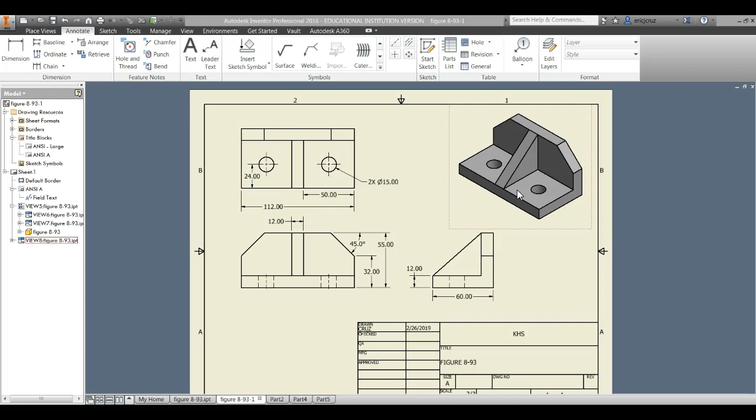Alright, so start a new part. Make sure your tools, document settings, units are set to millimeters. Apply, close. 3D model, start a 2D sketch.

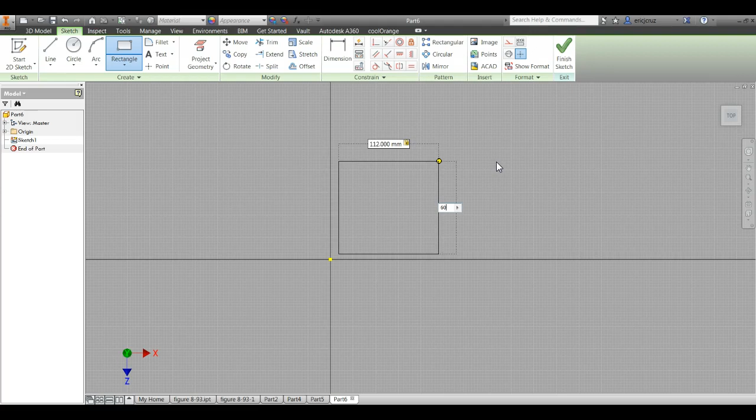We're going to start on the XZ plane. Make sure top is tilted to the horizontal side. The bottom is 112 by 60. Enter. Finish sketch. Extrude that by 12.

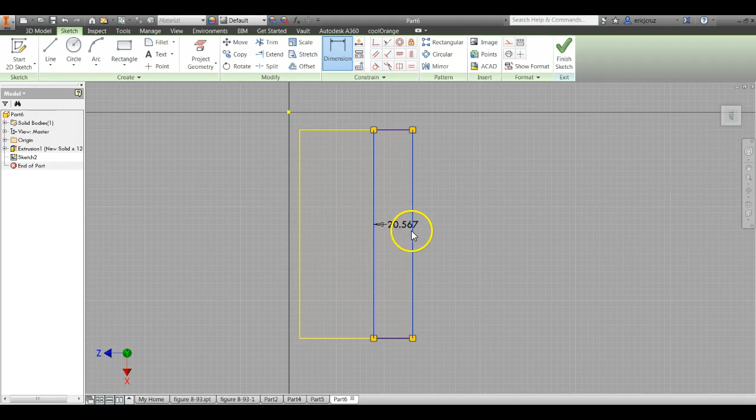Start a new sketch on the top there. Draw a rectangle from corner to side. Dimension that to 12. Finish sketch.

Extrude this one. This is going to be 55 minus 12.

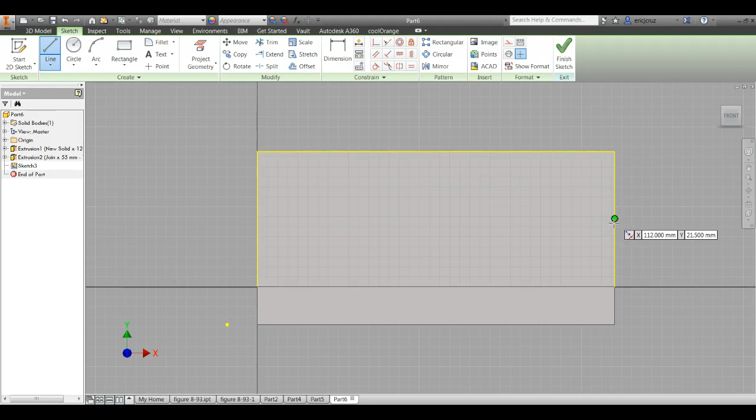Right-click new sketch on that surface. Click on line. Don't let it snap to the midpoint here where it's green. Snap it underneath it, and snap to there. Click on dimension. Click on project geometry.

Project the geometry of this surface. Then click on dimension. We're dimensioning from this point to the bottom, and that's 32. Then we're going to dimension this angle to 45. Click on this top line, then click on this line, and make that 45 degrees.

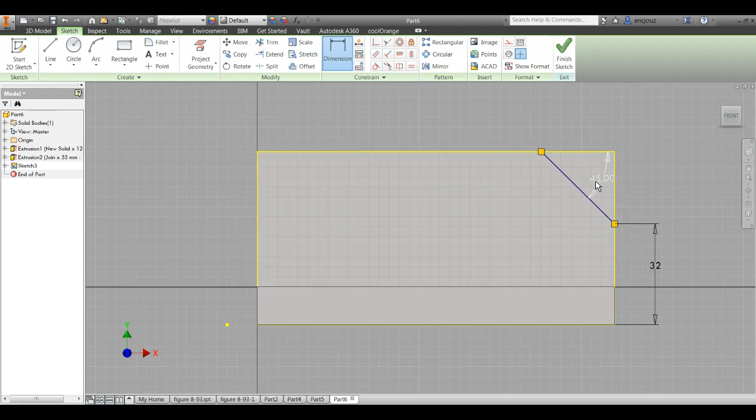We got to close up that triangle shape so that when we extrude it, it'll actually cut. Finish sketch. Click on extrude. Select the triangle. All, cut.

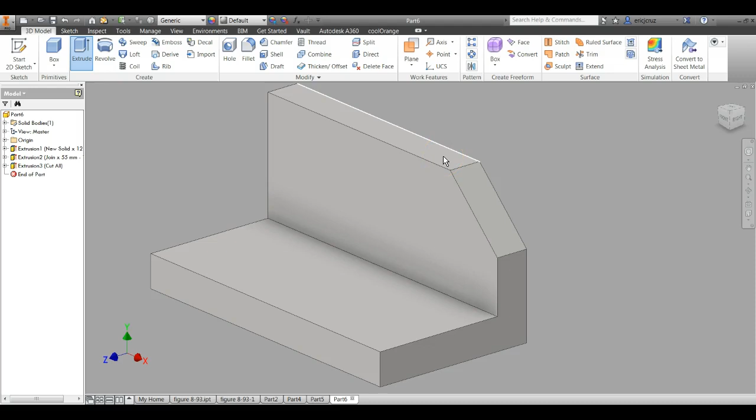Click on plane. Then click on mid plane between two planes. Select this surface. Flip your part. Select the surface, and you get a mid plane in the center, in the middle.

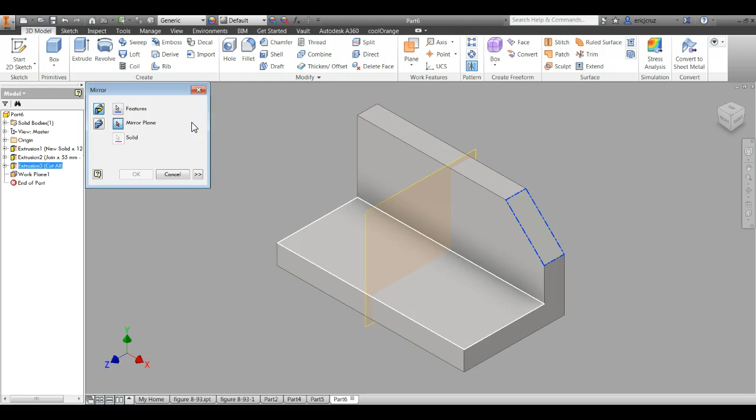We're going to click on this mirror button. Click on the feature. Select mirror plane and select the work plane 1. See that green line that pops up? Click OK, and you have mirrored that feature.

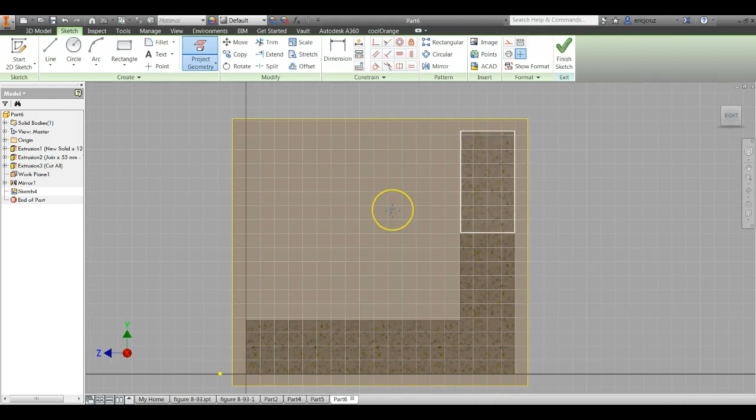On this work plane that we've created, we're going to draw. Right click, new sketch on that work plane. Go to sketch. Right click, slice the graphics so that you can see that plane's area. Click on project geometry. Project the geometry of those surfaces.

Click on line and connect this corner to this corner, and close it up. Finish the sketch. Click on extrude.

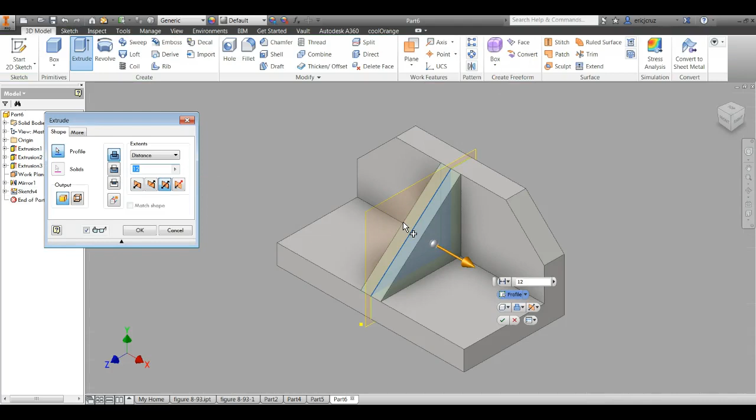This time we're doing a symmetrical extrusion. That is 12 wide on this surface. Click OK.

Right click, new sketch on this surface because we're going to make those holes now. Make a circle. That dimension is 15 in diameter. The dimension is 24 from the center to here. It's 24. Okay, great.

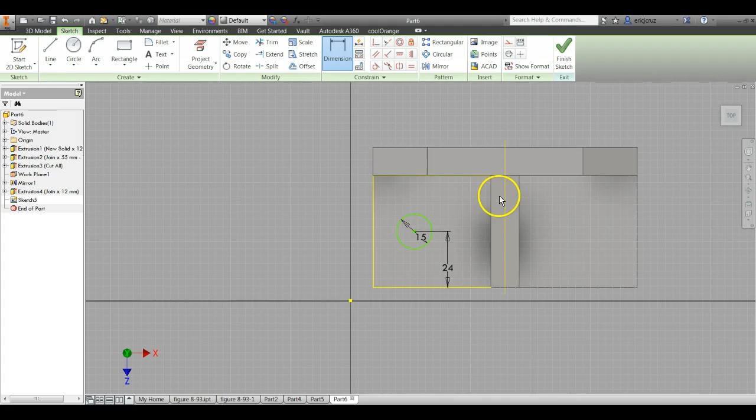And it is from the midpoint to the center. I don't think I can do that. Let's see, what is the best option here? If I click on project geometry, dimension here to, I'm not getting my midpoint.

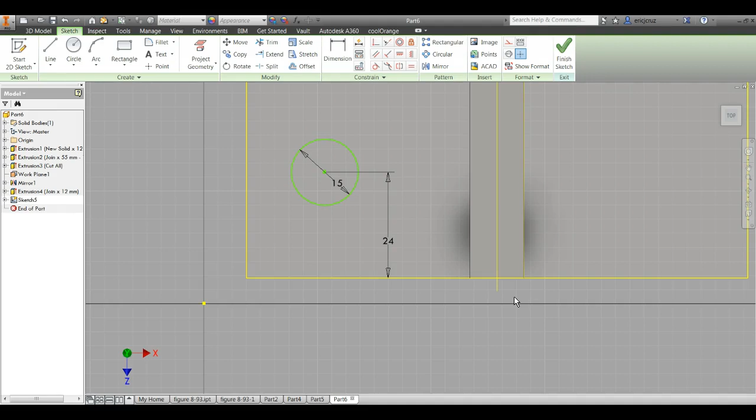Okay, let me draw my other circle here. Dimension, this is 24. The distance between the two circles is 64. 64. Oops. Just enter. And we need to center that.

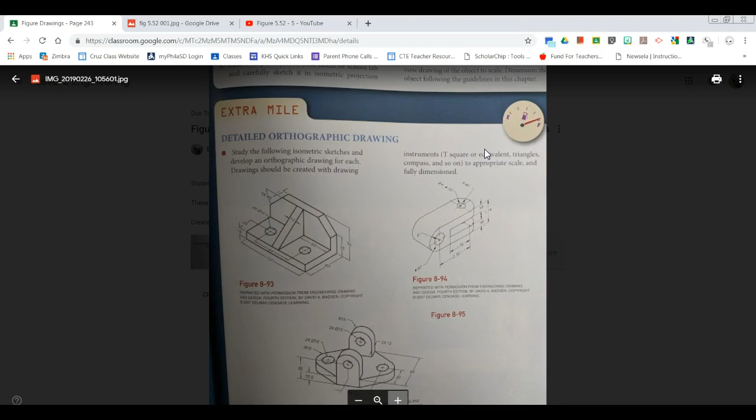So, oops, I don't know why I did that. Let's see, I want to go to the... It's 64, yep. So it's in the center. Okay. So it's gonna be...

Alright, so the trick here is to figure out what this distance is. That's 50. This is 64. The total distance is 112. So I'm just putting these numbers up so you can see them. Okay. So that means that...

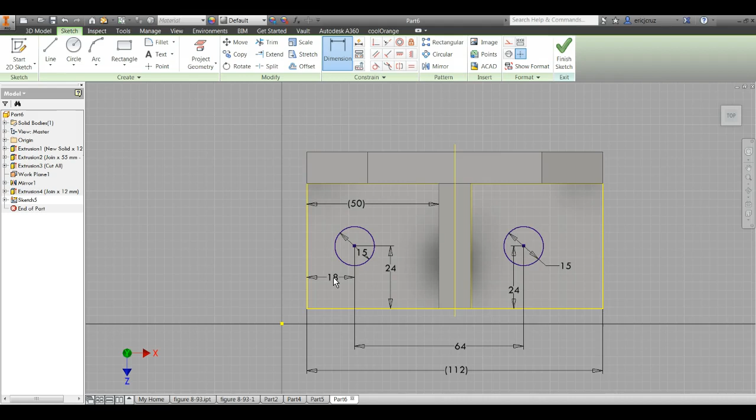So half of 64 is 32. So that would be 50 minus 32. So the dimension between here and here is 50 minus 32, which is 18. Okay, so that's definitely wrong.

Because if I go to tools and distance and I measure the distance between here and the midplane, I get 38. That should be 32. So what I'm going to do is a little trick here.

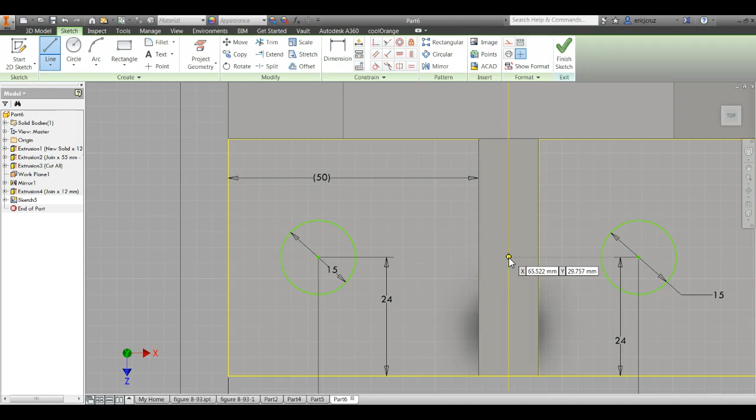I'm going to click on my line tool and draw a line that's 32 millimeters long. I'm going to move this until it snaps there and then dimension that. Hey, yeah, that's what we want.

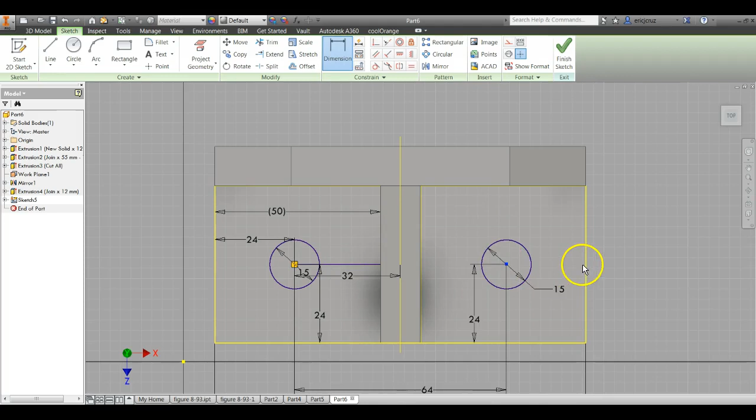So this should also be, if I dimension this to here, that should also be 24. It's going to tell me it's over constrained, which is fine. I'm going to get rid of this line. Okay, so that's how we find where that should be centered.

Finish sketch, extrude cut, all. Okay, there's figure 8-93.